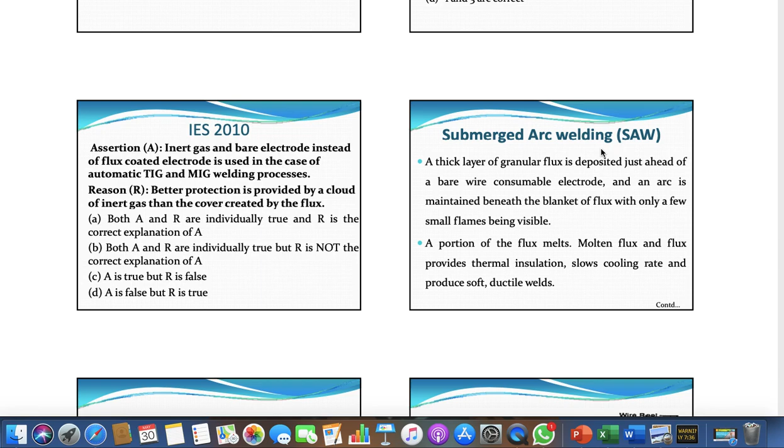Before starting that, I would like to complete this question, which is an IES 2010 question. As you know, in IES they used to ask assertion and reasoning type questions, and you have to select the best suitable answer among A, B, C, D. So let's see what the assertion says. Assertion A says inert gas and bare electrode instead of flux coated electrode is used in case of automatic TIG and MIG welding process. Okay, means flux coated electrode should be used.

Okay, while this is not suitable for both TIG and MIG, so that's why this assertion may be wrong. Now what is the reason? If A is wrong, then options A and B will be obsolete. Okay, means these should be deleted. Now your choice should be between C and D. So let's see what the reason is.

Reason R is: better protection is provided by a cloud of inert gas than the cover created by the flux. Okay, so this is what you have to cover, means you have to cover the flux using inert gas. Okay, so this is true, means R is true and A is false, so you may go with option D.

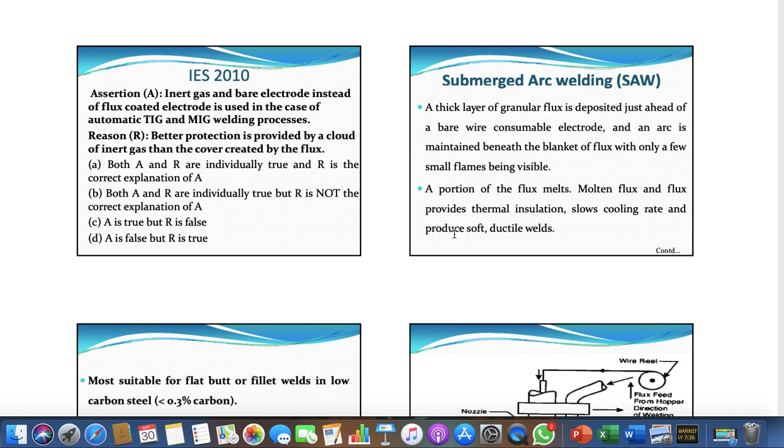The cooling rate will be very slow and it produces soft and ductile welds. This is a characteristic of the submerged arc welding process. Okay, let's see with what it is suitable. Most suitable for flat butt and fillet welds; these types of positions are most suitable for submerged arc welding in low carbon steel.

Okay, this process is not recommended for high carbon steel, tool steel, aluminium, magnesium, titanium, lead and zinc. These are the materials for which submerged arc welding is not at all suitable. So you have to keep in mind that you should not weld these metals with submerged arc welding.

As you can see in the diagram of submerged arc welding, this is your submerged arc here and this is your molten arc. Okay, this is the molten flux, this is the granular flux over it, and this is the electrode wire.

This is your electrode wire and this is the slag, and beneath the slag this is a weld. Okay, this is the nozzle and this is the wire reel from where you are feeding the wire, and the flux feed from the hopper, and the direction of welding. In the direction of welding you are feeding the flux.

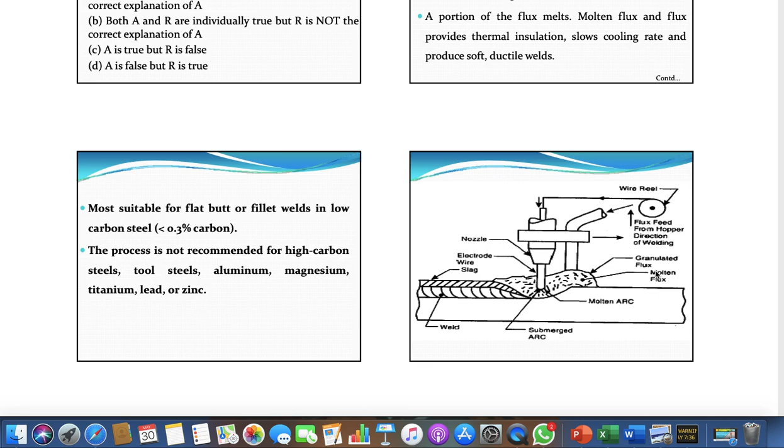Okay, so in this way you are feeding the flux, in this way you are moving your torch from left to right. This will create a submerged arc and molten flux. Okay, and this molten flux will be there over the weld pool. Okay, and this is your granulated flux. So these things you have to keep in your mind whenever you are doing the welding.

Now let's see what are the characteristics of submerged arc welding. These are high speed, high deposition rates, deep penetrations. Means submerged arc welding will work with high speeds, deposition rates will be very high, penetration will be deep, and high cleanliness due to the flux action, means the cleanliness over the part where you are going to weld will be high.

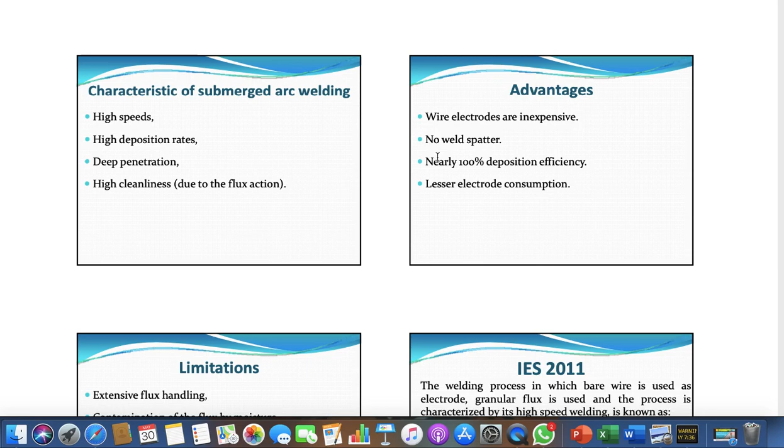Wire electrodes are inexpensive, no weld spatter, nearly 100% deposition efficiency, lesser electrode consumption, means electrode consumption will be very less, and no weld spatter means the welding quality will be very high, weld spatter will not be there. Now, what are the limitations for this?

Extensive flux handling, contamination of flux by moisture, large grain size structures, welding is restricted to horizontal position, and chemical control is important. Means flux handling will be very high, contamination of flux may occur due to moisture, and large grain size structures will form.

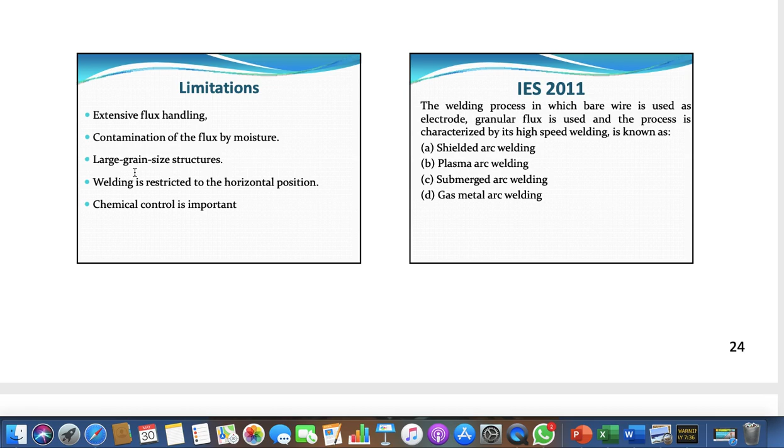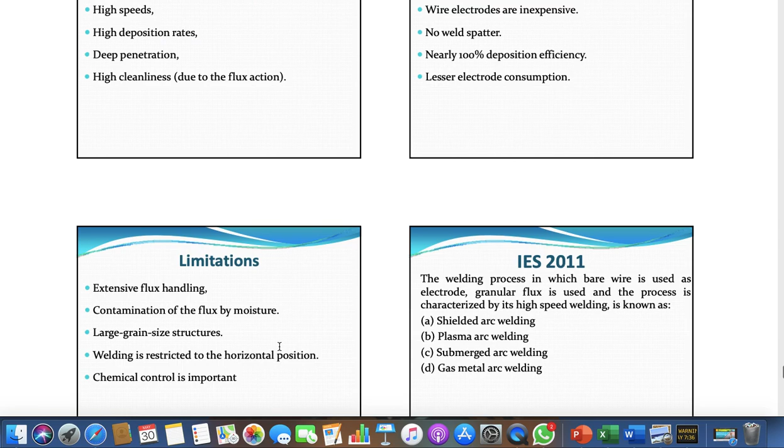Okay, and this is only restricted to horizontal position, as I have already discussed that this is suitable for flat butt and fillet welding. Okay, so this is mostly suitable for horizontal position. Okay, so these are the few advantages, limitations and characteristics of submerged arc welding.

Now let's see what is atomic hydrogen welding, AHW. An AC arc is formed between two tungsten electrodes along which a stream of hydrogen is fed to the welding zone. Means you have to feed the hydrogen gas in between the two tungsten electrodes. Okay, so in this way, the molecules of hydrogen are dissociated by the high heat of the arc in the gap between the electrodes, and the formation of atomic hydrogen proceeds with the absorption of heat. Here you are going to absorb the heat.

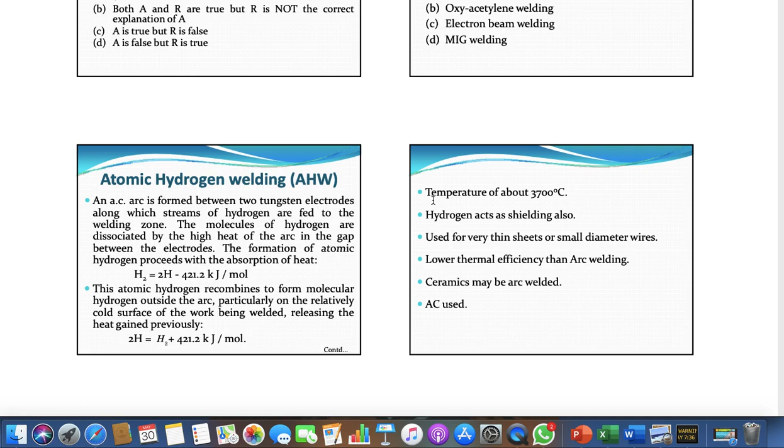Now, this atomic hydrogen recombines to form molecular hydrogen outside the arc, particularly on the relatively cold surface of the work being welded, releasing the heat gained previously. Whatever heat you have gained here will be released whenever the atomic hydrogen recombines into molecular hydrogen. Now the temperature is about 3700 degrees C in atomic hydrogen welding,

and hydrogen acts as a shielding gas also. Okay, used for very thin sheets or smaller diameter wires, lower thermal efficiency than arc welding. Ceramics may be arc welded, and AC alternating current will be used for atomic hydrogen welding. So this is the process of atomic hydrogen welding.

So as of now I'm stopping here. For other content we will come with another tutorial of the same welding chapter related to the manufacturing process of fourth semester in Rajasthan Technical University.